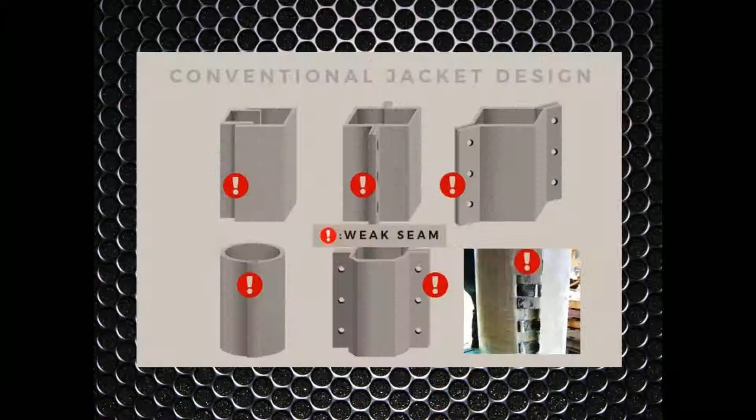Conventional pile jacketing systems all require the use of some kind of a seam, and this seam can be the weak point for the jacket, so there's always a limitation on the structural capacity added without adding extensive rebar cages. This also introduces a point of entry for water and air, which can allow deterioration of the pile to continue in the future.

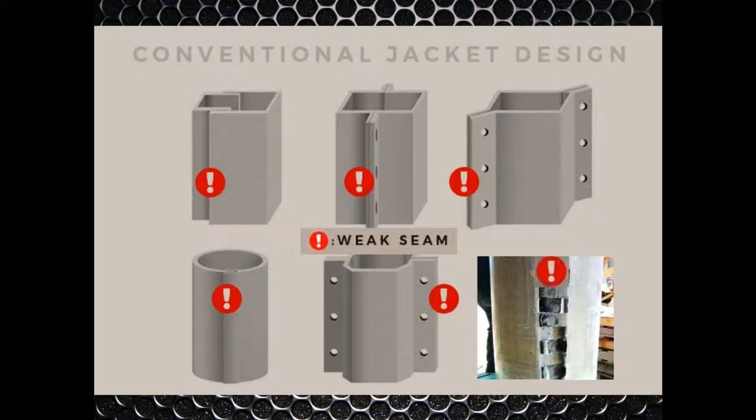These systems often utilize self-tapping stainless steel screws to provide a connection fastening point for the tongue and groove, which can also be a point of entry for water and air into the system.

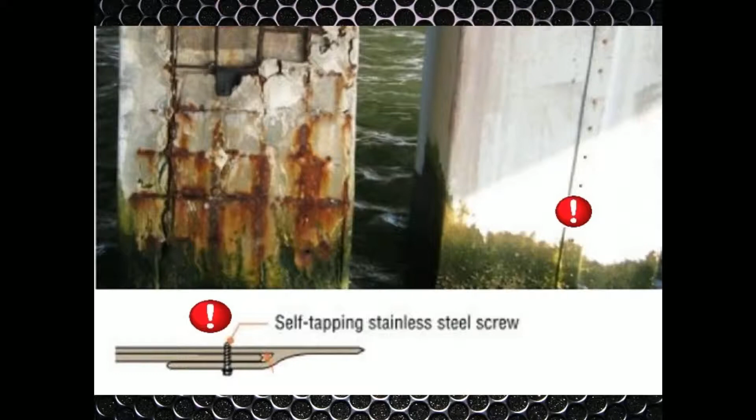The PileMedic system is very different from any other jacket on the market due to the fact that we don't have any vertical seams. Since the jacket is wrapped around itself twice and epoxy bonded to itself, it eliminates that weak seam. And you can see here how we can build any height pile jacket that we want by building consecutive 4 feet segments, and the first segment gets pushed down while the second segment will get wrapped around the top of the first jacket to create a pile jacket of any height.

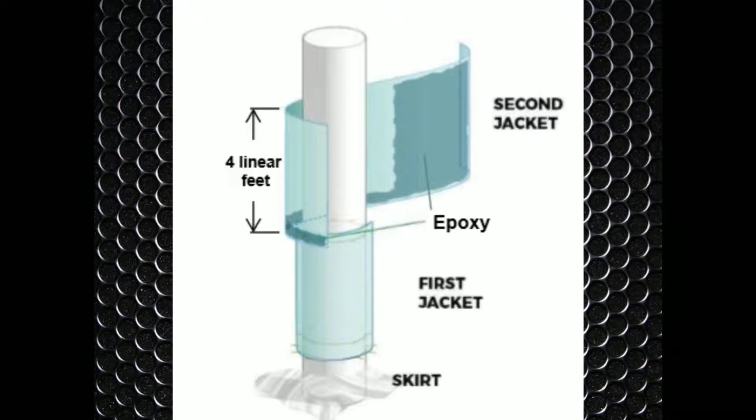The elimination of the vertical seam allows the jacket to provide a high confining pressure, which increases the pile capacity without rebar. The confining pressure of PileMedic is very effective against certain concrete conditions that create a dilation effect inside of the concrete, causing premature cracking, and this confining pressure can counteract those forces and prevent the cracking from happening.

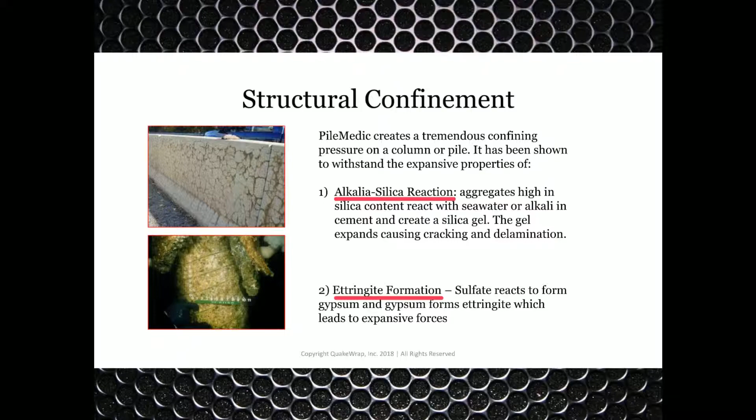One of the first third-party studies that was performed was by Caltrans, and they tested it on a concrete bridge column. Basically, they wanted to find out if a bridge was damaged severely in an earthquake, including rupturing of the longitudinal rebar, could we install PileMedic onto that column and then retest it after the repair and see if we brought that column back to the original capacity. And the test was successful. We were able to exceed the original capacity and actually reached the limit of the press.

A similar test was performed by the Nebraska Department of Roads on timber piles, simulating deterioration by cutting out a section of those piles. And then we proceeded to wrap the damaged piles with PileMedic, and then they retested those piles with all the samples failing outside of the repair section, effectively returning the pile to its original capacity.

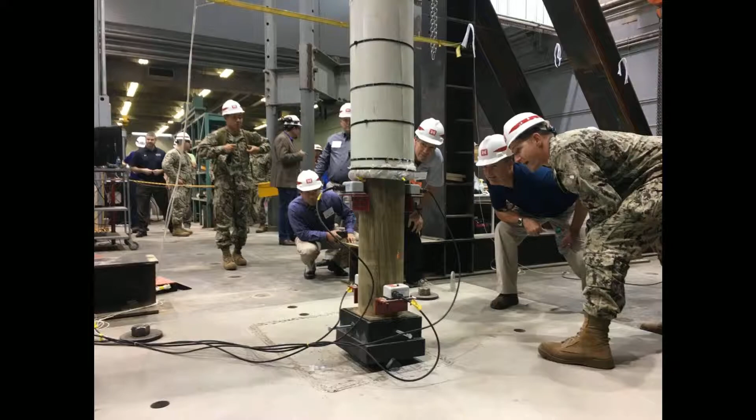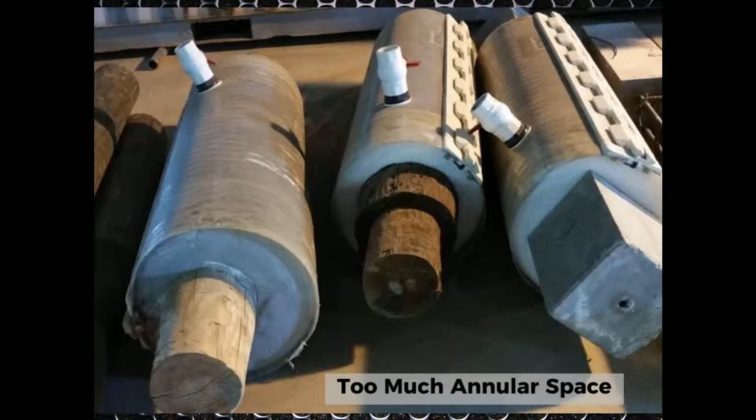Here you can see some of our competitors' jackets during the Army Corps of Engineers testing, and it was noted that there was too much annular space for a lot of these systems. The PileMedic system often has small annular spaces. The time to complete these repairs also was unacceptable to the Army Corps staff, taking several days rather than the several hours that it took for the PileMedic system to be installed.

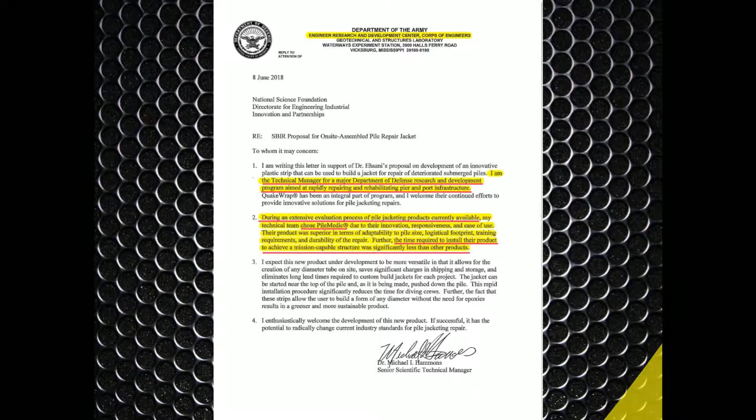This is a letter from the Engineer Research and Development Center at the Army Corps of Engineers from the Senior Scientific Technical Manager outlining the reasons why they decided to go with the PileMedic system. In this letter, they noted that the primary reason for choosing PileMedic was due to the innovation of the product, the ease of use, and the adaptability to pile size, meaning one size fits all, not having to order a special size. Also, the logistical footprint that we saw on a previous slide.

Training requirements were very minimal, and the durability of the repair. But probably the most telling aspect was that the time required to install PileMedic to achieve a mission-capable structure was significantly less than other products.

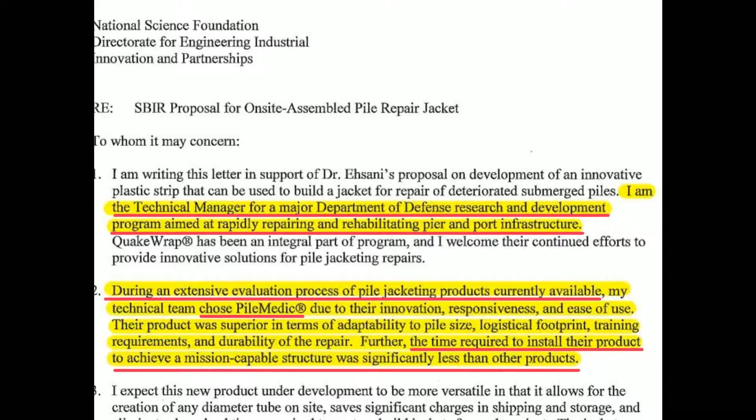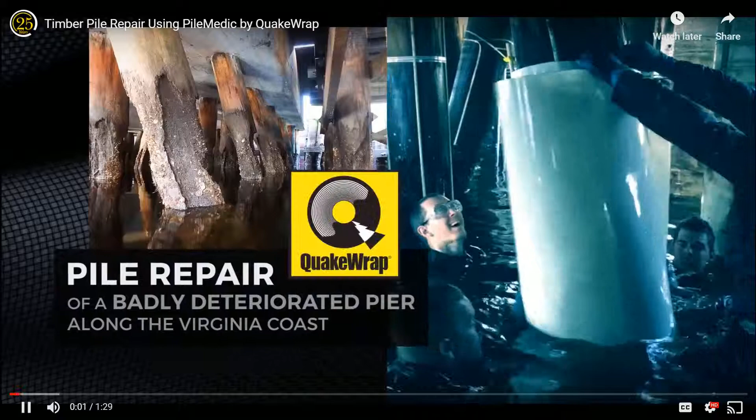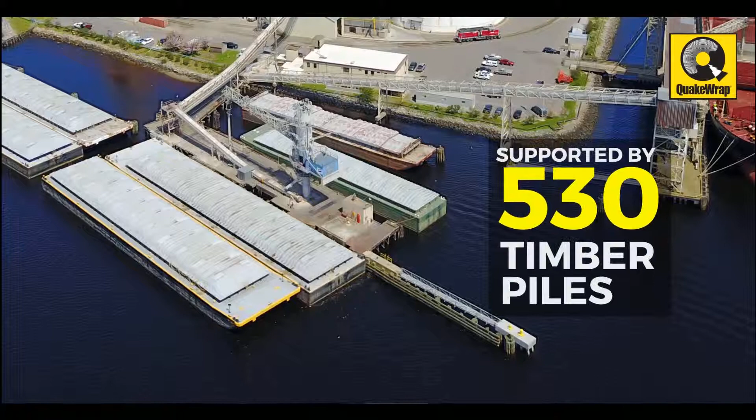Pile repair of a badly deteriorated pier along the Virginia coast. This 400-foot-long pier has a combination of concrete and timber cap and decking supported by 530 timber piles with an average section loss of 50% at the splash zone. The client required that the deteriorated 13-inch to 15-inch timber piles be restored to their original structural capacity while the port remained in service.

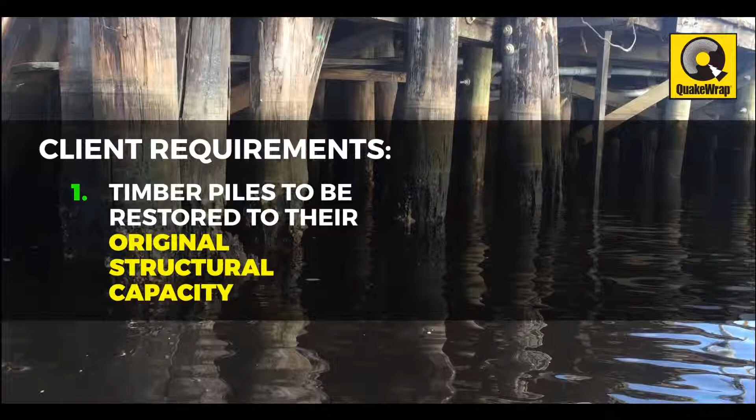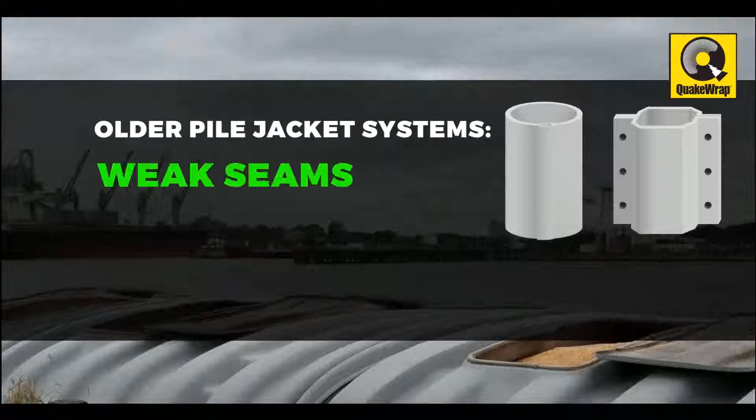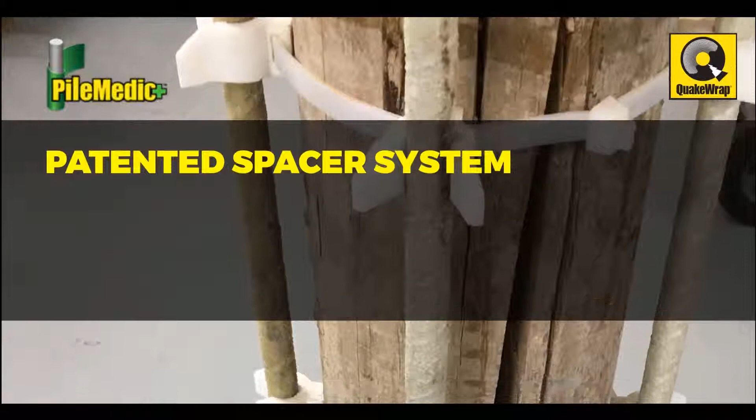Older pile jacket systems require rebar cages and a fiberglass jacket that gets glued or bolted along its vertical seam. These weak seams do not provide structural confinement and are an entry point for water and oxygen to weaken the system over time. The PileMedic system utilized its patented spacer system to maintain the annular space and provide easy snap-in installation of longitudinal FRP rebars for additional flexural strength.

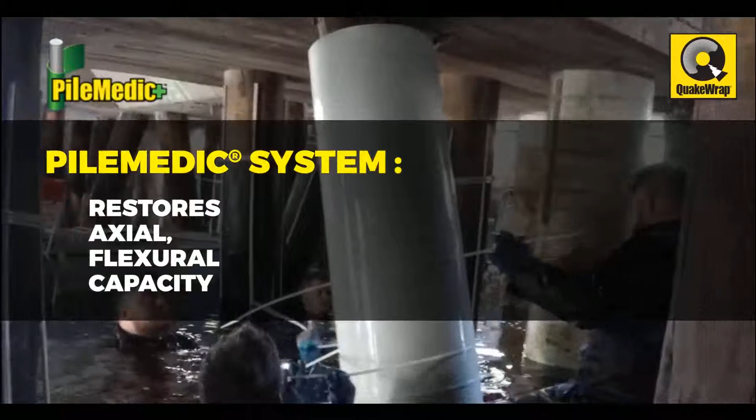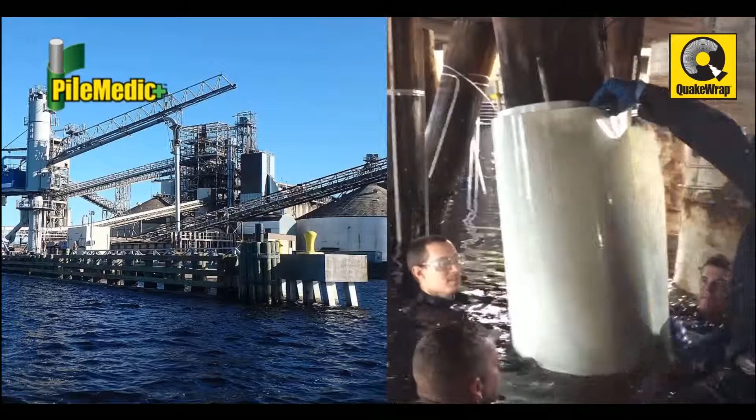The PileMedic system was chosen because the engineering design restored the axial, flexural and shear capacity at a low cost of installation. The system allows full restoration of the piles, even at sections of the pile with 100% section loss. These unique features allowed for the rapid repair of the full length of 530 timber piles all the way to the seabed. The repaired piles are fully encased in FRP and protected from the harsh environment. This will extend the useful life of the pier for decades to come.

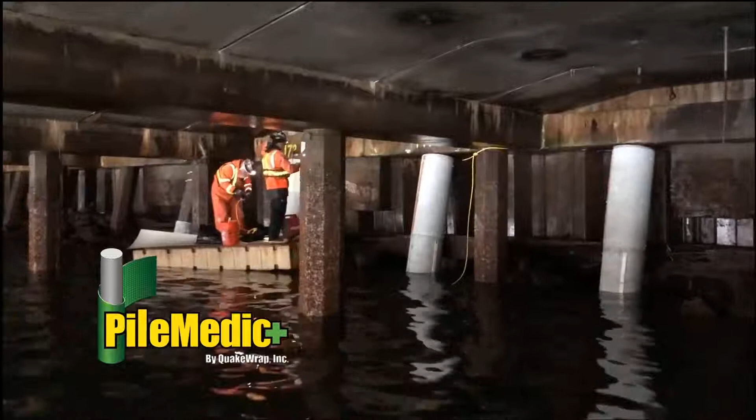This is a pier at the Port of Seattle that we used PileMedic to repair about 80 octagonal concrete piles that were showing signs of cracking due to a concrete condition that required a high confining pressure in order to mitigate the cracking. And you can see some workers installing the PileMedic here on this video.

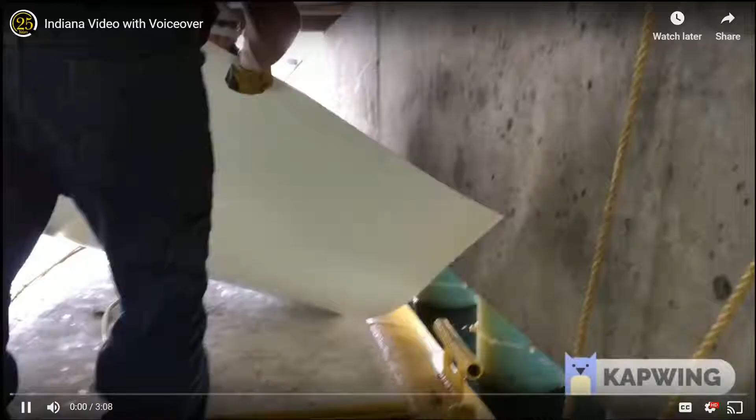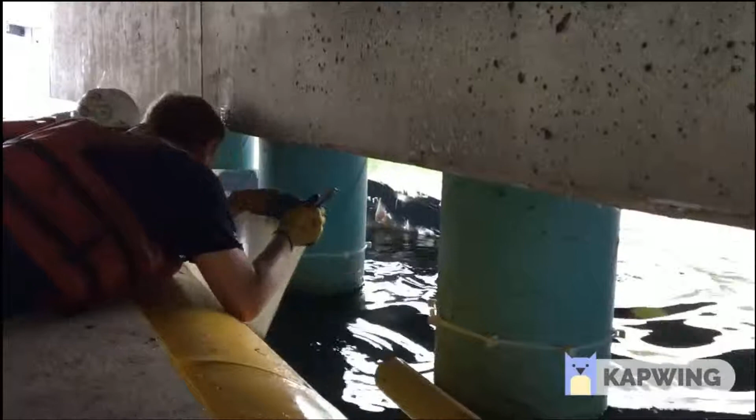This shows an installation in Indiana on a bridge with steel piles. You can see that we have a topside crew here. The PileMedic has already been cut to size above ground, and epoxy has been installed. And you can also see the zip ties with the spacers that are going to hold the annular space and any rebar if necessary. This particular job did not have any rebar.

Those spacers have already been installed, and now they're simply wrapping the PileMedic around the spacer system. And you can see they kind of have the first layer on. They're holding on to the edge of the PileMedic so that it doesn't spin as they're pulling that second layer around the pile.

The diver has a handle attached to the PileMedic with some vice grips, and they will just hand that to the topside crew, which in turn pulls the PileMedic around the pile, handing it back to the diver, and then they take off that top vice grip and apply it to all 3 plies or 2 plies around the PileMedic so that they can get the zip ties in place. And we put zip ties around the PileMedic in order to hold it in place while that epoxy is curing.

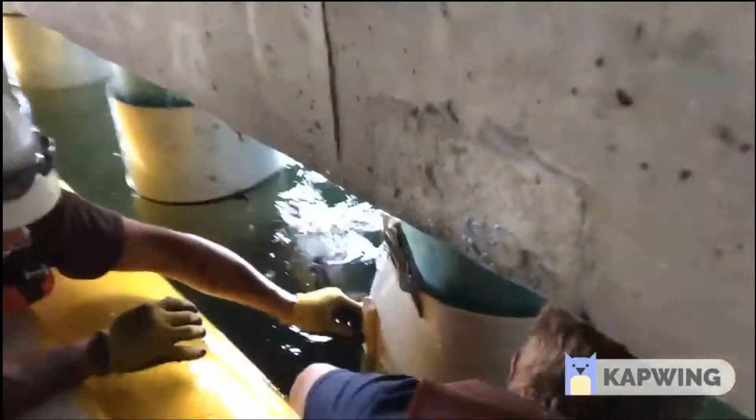There'll be an initial set within a couple hours, but full curing time is about 24 hours depending upon the water temperature. And a lot of the work is done by the topside crews with assistance of a diver. Sometimes, depending on the depth of repair, you don't even need a diver. You can see them holding a piece of wood in place. We will often put a piece of wood on the very end edge of the PileMedic before installing the plastic zip ties.

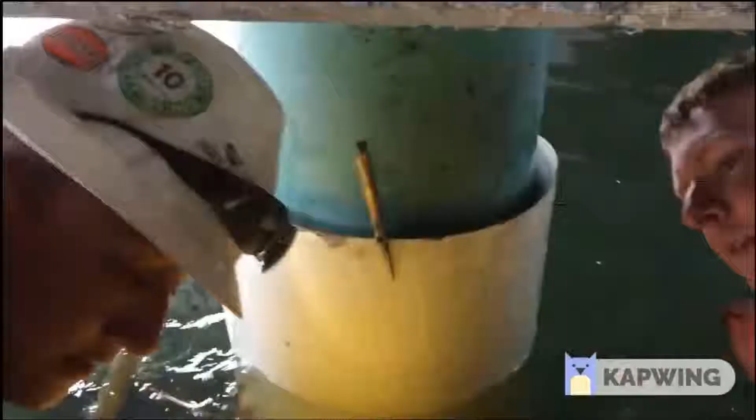And that wood will hold that edge down so that we're sure that the epoxy cures all the way to the edge of the PileMedic and we don't have an edge sticking out. And oftentimes they'll also use some thickened epoxy to detail that edge just to make sure that nothing can get behind it. The whole process takes about 3 minutes, I believe this video is.

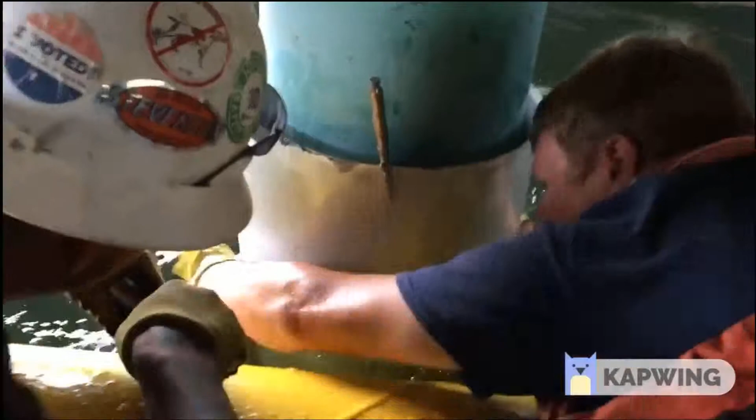So the install time is very minimal once the spacers are in place and the epoxy is applied, which also is not very time consuming. So the whole process is very simplified and does not take very long.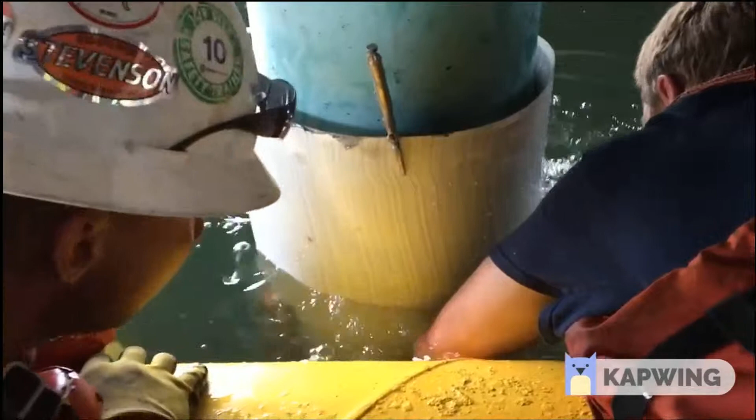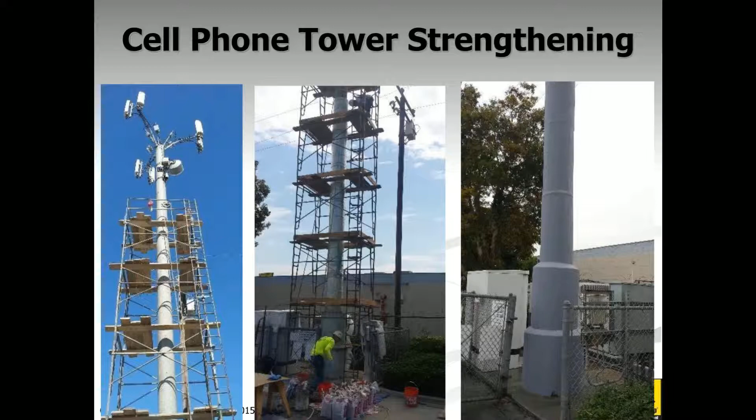PileMedic has also been extensively used to strengthen cell phone towers. Oftentimes they want to add additional equipment that's heavier than the original, and in order to do that, they need to strengthen the base. This is an ideal application for PileMedic due to the amount of capacity that can be increased with the solution.

Some projects require that we transfer the load to the foundation or sometimes to a pile cap up above. So we're able to dowel in rebar, which is then encased by the PileMedic and has an annular space which grout is placed into. And this creates a moment connection to pass the load from the repair to the foundation.

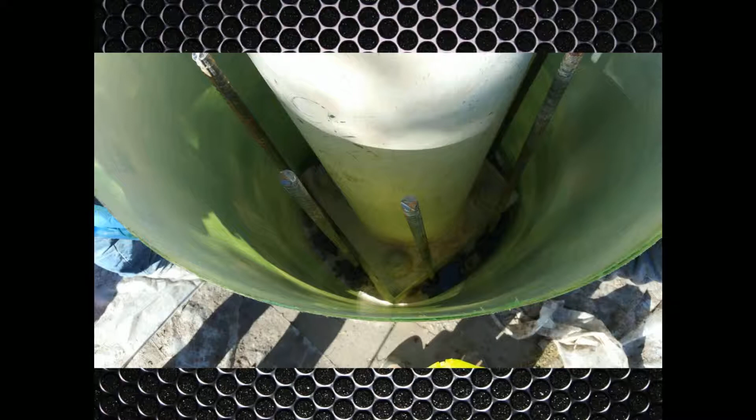Here you can see where the rebar has been doweled into the foundation and is in the repair section with the PileMedic around it, which then gets filled with grout to make the load path continuous from the foundation to the repair area or from the repair to a pile cap above in the case of a bridge column or marine piling.

In this design example, you can see the capacity that PileMedic introduces to a pile compared to a conventional jacket. If you have a 12 by 12 square concrete pile with original compressive strength of about 4,000 psi and ignore the reinforcing steel, the axial capacity is about 490 kips.

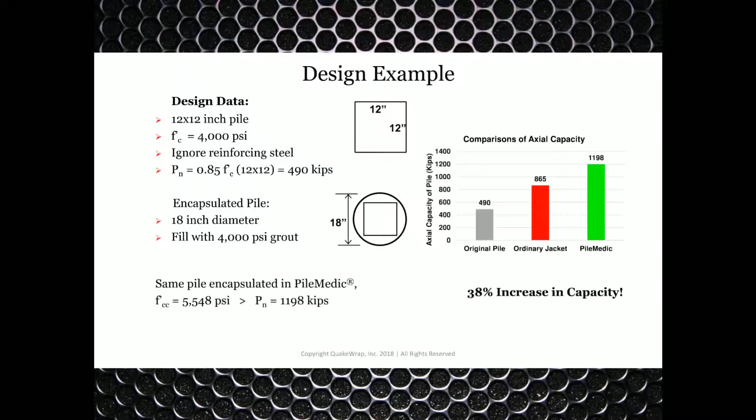If we wanted to increase that capacity, we could put an ordinary jacket on, 18-inch diameter, filled with 4,000 psi grout, resulting in about an 865 kip capacity. The same pile encapsulated in PileMedic results in about 1,198 kip capacity. So that's about a 38% increase in capacity compared to a conventional jacket.

Here you can see a conventional design utilizing a traditional pile jacket and requiring ties, number 3 ties at 6 inches on center with rebar couplers. And this is a very labor-intensive repair that is required in order to increase the pile's capacity when you're not utilizing a jacket which has that hoop strength built into it due to the confining pressure that it introduces.

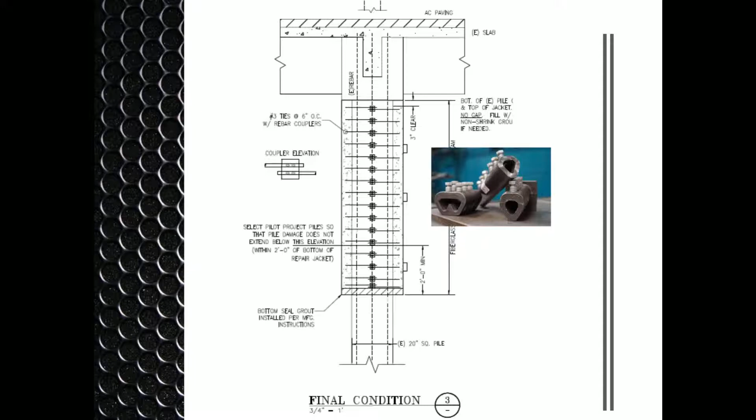So as you can see, the couplers there have a lot of fasteners that have to be manually tightened and torqued down by the divers, which is avoided by the PileMedic system. Here you can see the PileMedic design, which utilizes no rebar, yet can increase the pile capacity just as much as the conventional repair that utilizes extensive rebar cages.

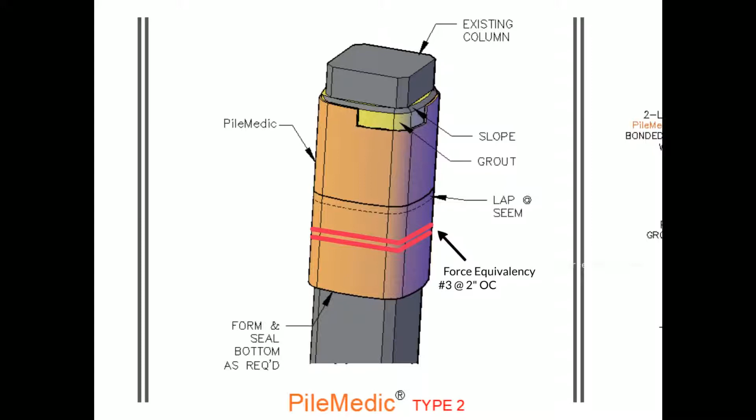As you can see in this illustration, we were able to substitute PileMedic in this case. Their number 3s were 6 inches on center. The force equivalency provided by the PileMedic laminate is a number 3 at 2 inches on center, and that's not only in the hoop direction but longitudinally also. So we were effectively able to eliminate the labor-intensive process of installing rebar hoop cages.

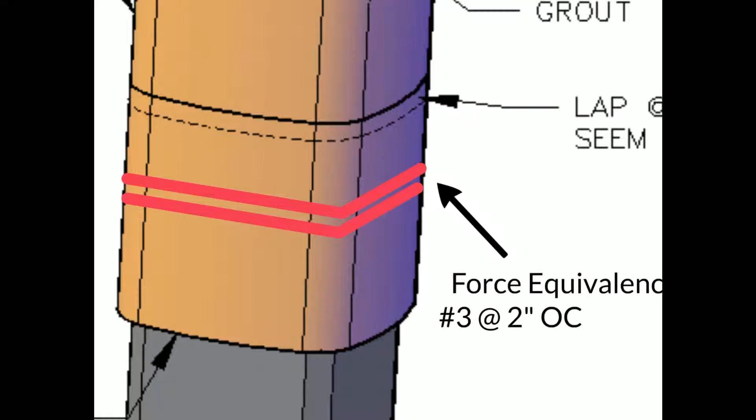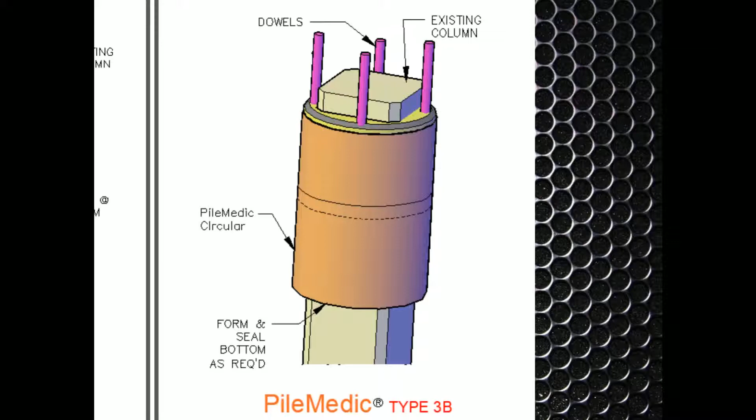In cases where the project goal is to increase the flexural capacity of the pile, we can introduce longitudinal rebar, which are simply snapped into place into our spacer system prior to wrapping the PileMedic around the pile and rebar and filling with grout.

The main competitive advantage that PileMedic has compared to all the other jacketing systems is primarily its ability to introduce a tremendous amount of capacity without the use of bulky forms or labor-intensive rebar cages. In addition to that, one size fits all; you're pulling this off of one roll of material to make any size pile jacket. It's increasing axial and flexural strength without the use of rebar, in some cases with additional rebar for bending.

It's providing a tremendous confinement pressure due to the lack of seams, which is the main reason for its ability to increase capacity. A very long lifespan due to the fact that we use all composite materials. Very easy to install with a system of spacers that we've developed. And full restoration of pile capacity, as I've mentioned before.